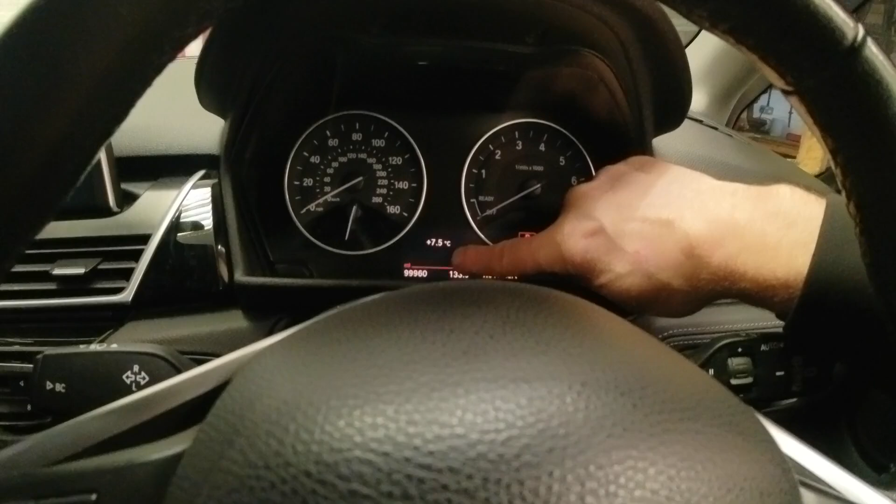So foot's on the brake, pressing the button, nothing's happening. This car's almost 100,000 miles. But our hybrid battery, which is just switched off - let's get it back on again - it's showing 10%. So we've got 10% there. We had as low as 6% or even lower than that, and the car was still starting.

These hybrid vehicles, they don't use a conventional starter motor. They actually use the alternator to start the car. That's why you get seamless change between electric drive and engine drive - you never hear a starter motor engage.

So the alternator on most hybrids is multi-purpose. It charges when the engine's running, and it's used when you want to go from hybrid drive to engine drive.

It energizes the alternator, and the alternator uses the drive belt to seamlessly start the engine. So you never hear the ratcheting sound when the starter motor engages.

We'll go over to the office. I'll show you a picture of that so it makes more sense. And then we'll get the scanner on it, and then we'll see what faults we've got and see if we can resolve this issue.

So here we are in Partslink24. I've chosen the car with the chassis number up there. So this is the alternator and starter motor. Look at the description here - it says starter motor generator.

So hybrid cars use this system - alternator, starter, all built into one. You can see it's liquid cooled as well, and it looks like we've got 3-phase wires going into this as well.

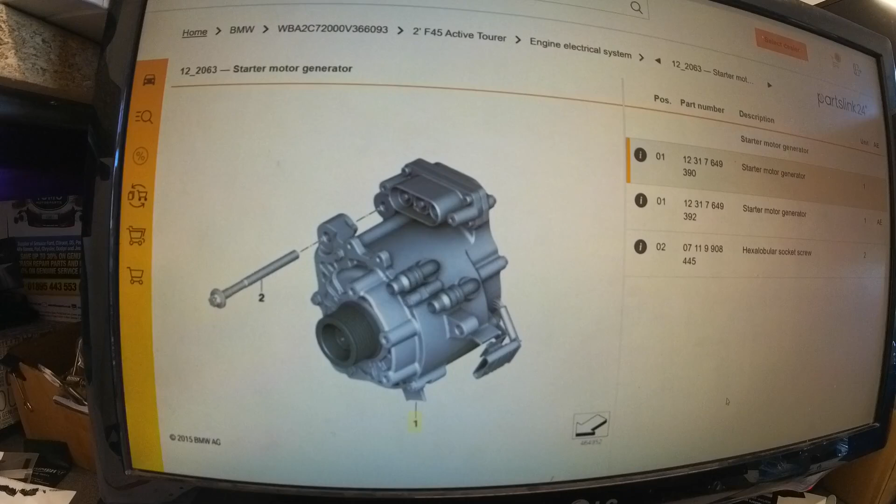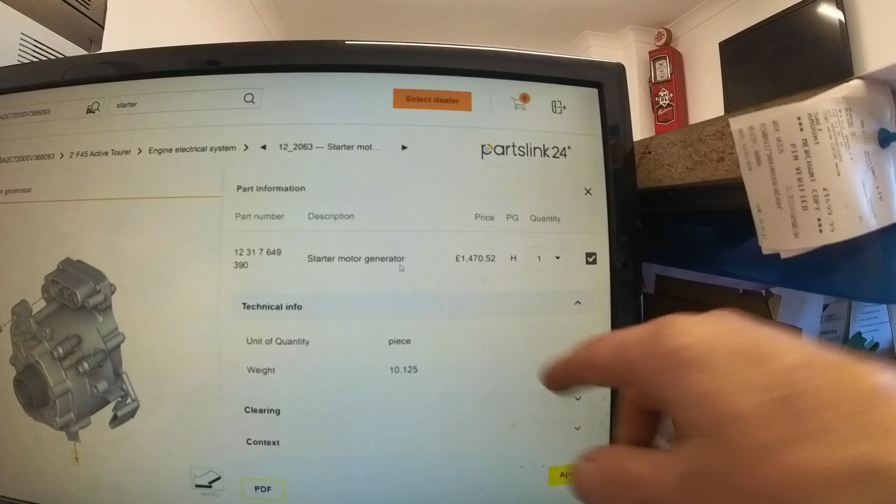Out of curiosity, we can have a look, see what these are going to cost if you wanted one. And we've got a price here - if you're in the UK, it's almost £1,500 plus tax, which is £1,800. Very, very expensive item.

There was a second part number there - let's see what that one is. Yeah, this has been dropped, so it's part numbers - that was a later number. So they used to be £1,284, now they're £1,500. So every supersession seems to put a price up for something.

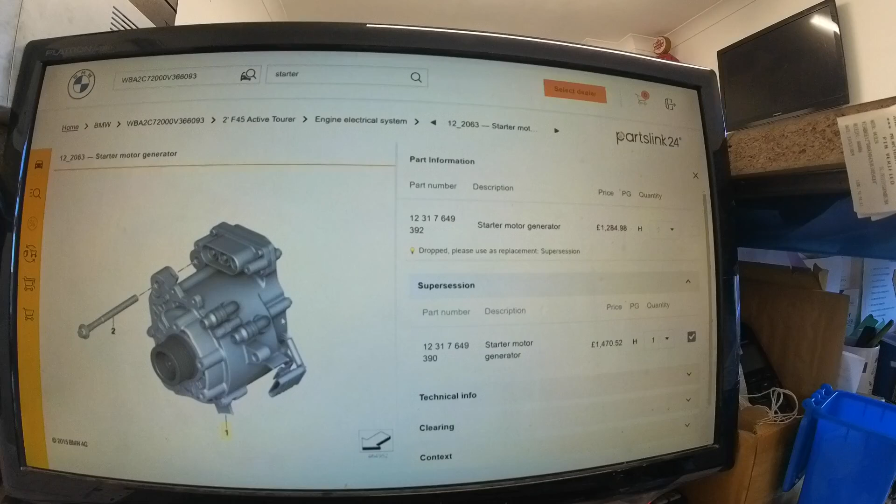But for those of you who didn't know, hopefully you've learned something today, and that's been interesting.

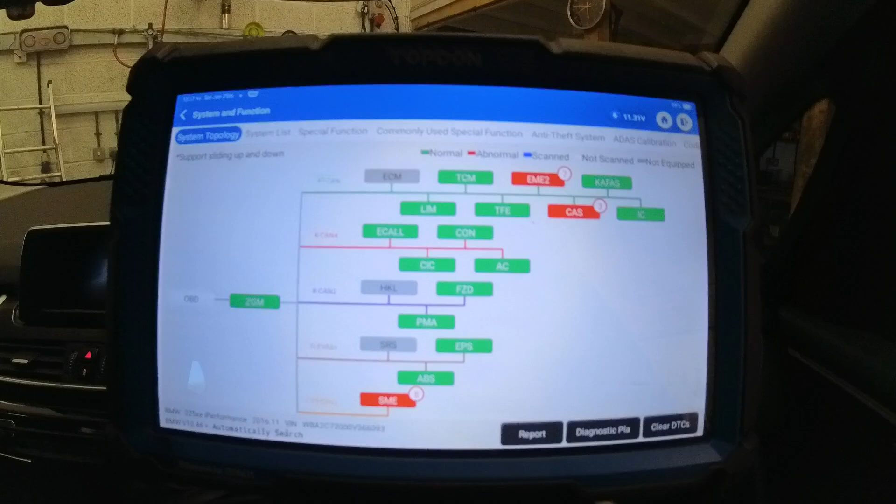Right, done a full scan of the car. We can see where the red's highlighted - we have areas of concern. Greens are all good, and the grey's not applicable to this vehicle. Well, engine control module is, but that hasn't come up for some reason.

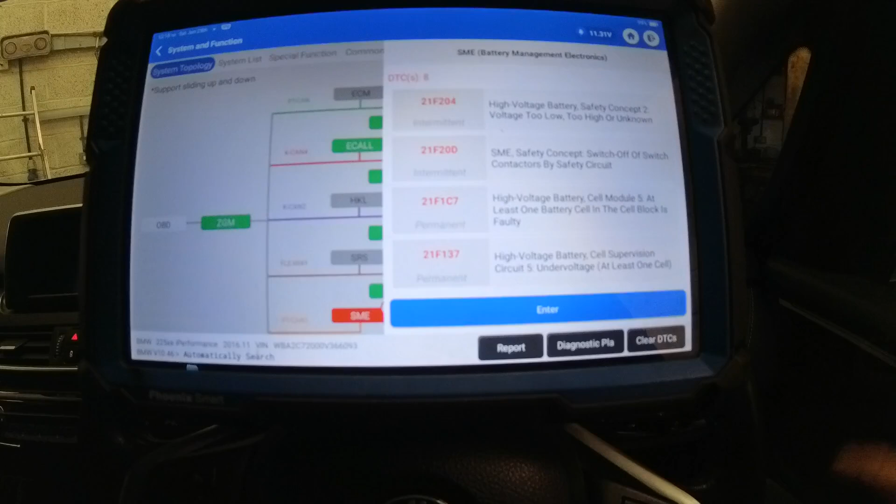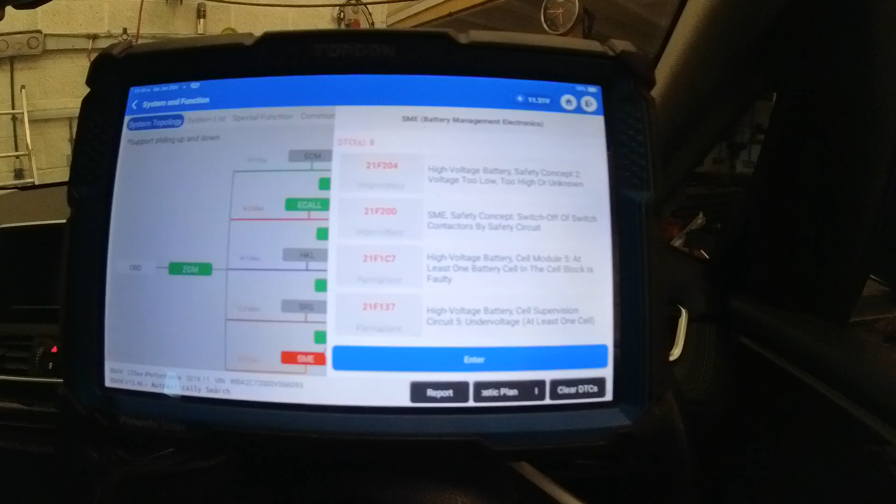Right, let's just have a look at the battery management electronics. We can see we've got quite a few fault codes in there, and the main one of concern is this one here, which is high voltage battery cell module 5. At least one battery cell in the cell block is faulty. So it looks like we have an issue with the battery.

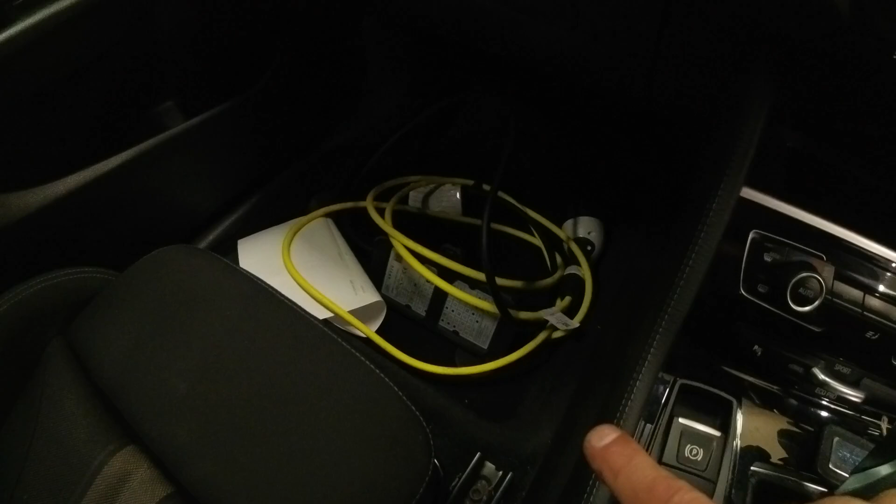Before we delve into replacing the battery, I've got a charge lead here, so I'm just going to plug that into the wall and just see if we can get some charge into the battery system and make sure that side's working.

Right, let's do that first. Just going to plug this in. Let's see what we get. Right, so it's recognised the plug, and now it's flashing red. On here, we have some symbols.

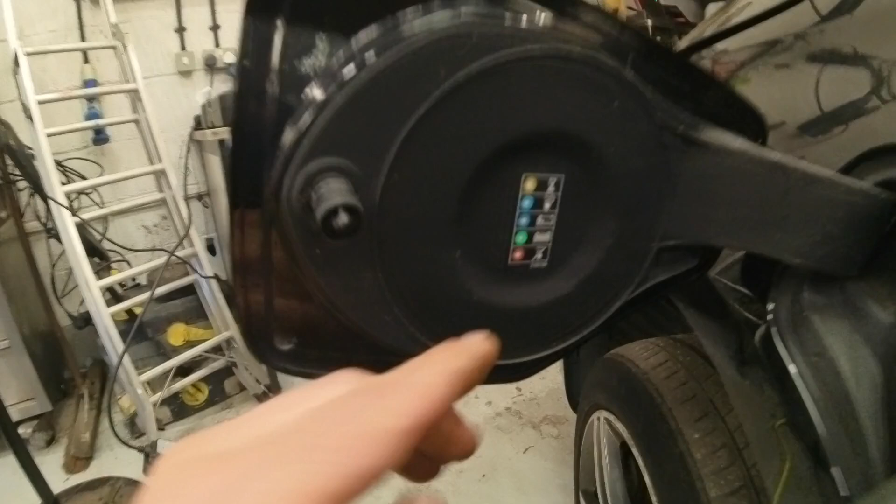Red means not charging - there's an issue. We already know there's an issue, and the red ring is a dead giveaway. So we're not going to charge this battery up.

Just going to go over to the boot, and ta-da, we have a battery. Customer bought this off eBay. We have no idea if it's good or bad, but the job for today is to drop the original battery module out, and then that one's going to go in.

There's a whole procedure for just doing this swap. It isn't just bolt it out, unplug it, and put another one in. There's a long-winded procedure, so we're going to follow the manufacturer's guide to do this properly. We're going to go over to All Data, have a look, see what the manufacturer is telling us to do, and go through that procedure.

Right, that's only a 7 kilowatt battery and I can't even lift it. My brake tester here is actually a weigh bridge - I've just set it to zero. I'm going to use my trolley, get it over there, get a hand to get the battery off, and put it on here just to see how much it weighs. If I can't lift 7 kilowatts, God knows what 75 kilowatts weighs.

Right, let's see what that weighs - I was trying to break my back there. That was a struggle. I managed to get it out on my own, but I lifted the jack up to bumper level and slid the carpet across to get it out, but I couldn't get it off the trolley. And that's why.

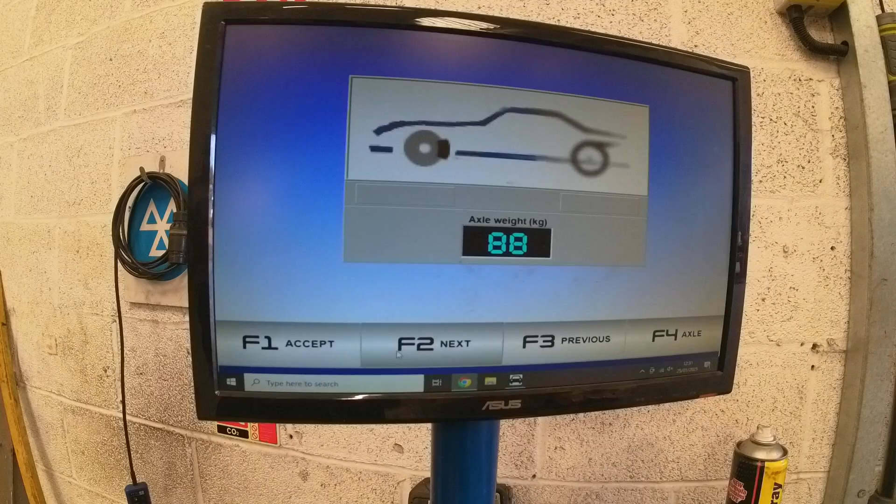88 kilos. So if 7 kilowatts weighs 88 kilos, 75 kilowatts, being 10 times bigger, that must be 800 kilos or more. That's unbelievable. No wonder you get low range out of an electric car, because you're carrying almost a ton of batteries. Wow.

Okay, that's the replacement - we need to get that one out. Let's go into the office and see what the procedure is to get the old unit out.

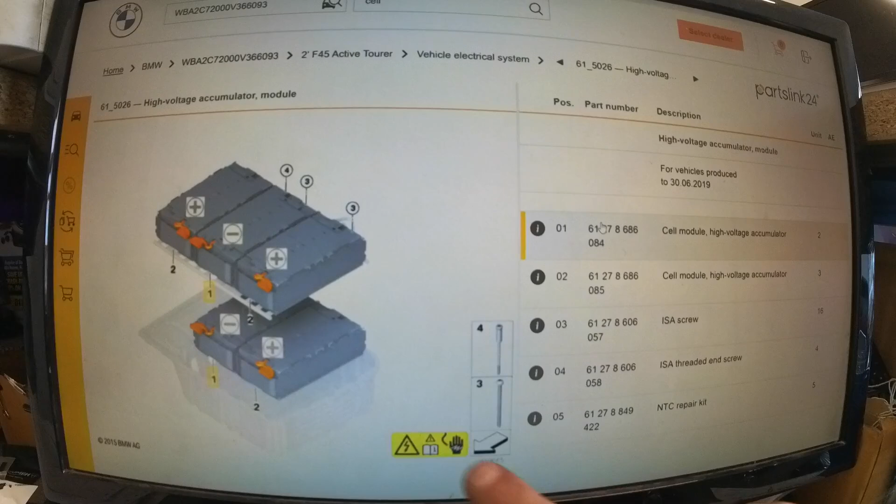Whilst we're still on Parts Link, I thought we'd have a quick look at these modules. You can see from the diagram there's 5 modules in there. They're not numbered 1 to 5, they're kind of numbered as a left and a right - you can see we've got 2 ones here and then 3 twos, and some different numbers as well. But let's have a look and see what a cell module costs.

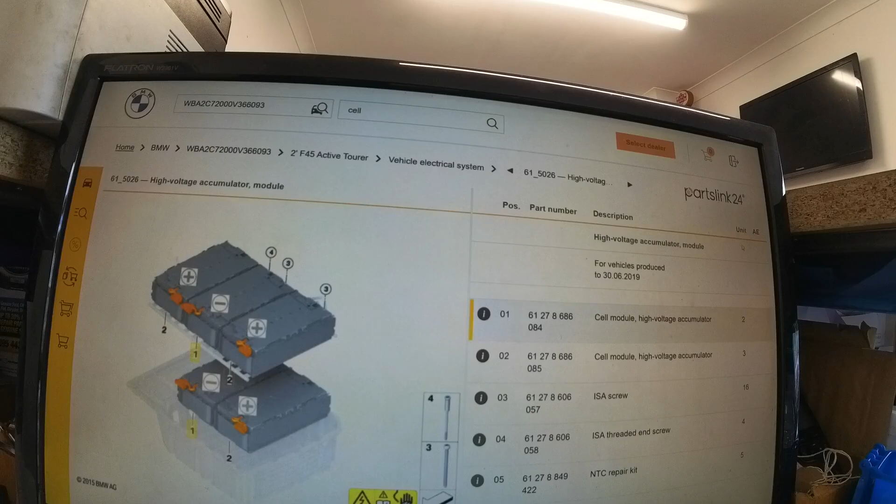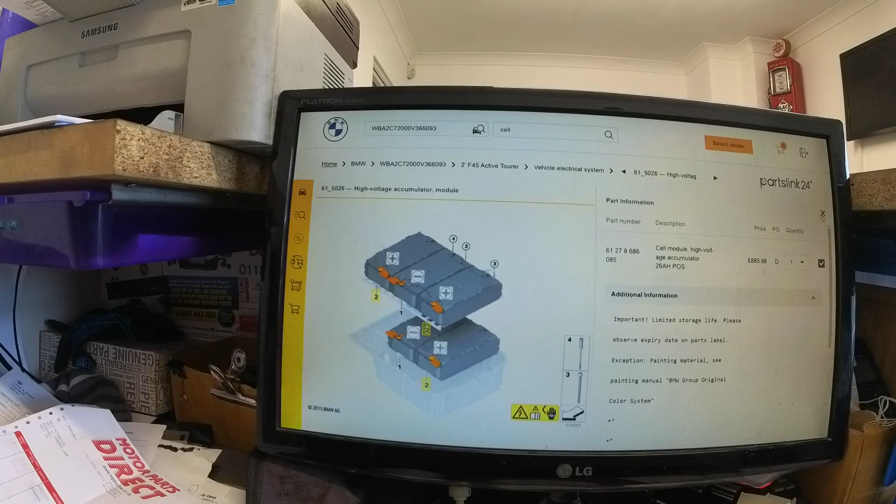So one cell module is £886 plus tax, so it's £1,000 or more. Let's see if the number 2s cost any different - yeah, roughly the same price. So to buy 5 cells it's about £5,000 plus VAT for a 7 kilowatt battery, actually 7.6 kilowatts. So if you times that by 10 to get to 75 kilowatts, this £5,000 could potentially be £50,000.

They're not normally as much as that - I know for a fact the Jag I-Pace is £36,000 for a battery module. But this is only a hybrid, and if you're paying £5,000 for a hybrid 7.6 kilowatts, God knows what 75 kilowatts is going to cost.

Right, so this is BMW tech data - I'm limited to what I can show you on this. But first we've got to drain the air conditioning system. I've just had a look at the replacement battery - yes, there's 2 aircon pipes going there, so it's using the air conditioning system for cooling and heating to manage the battery.

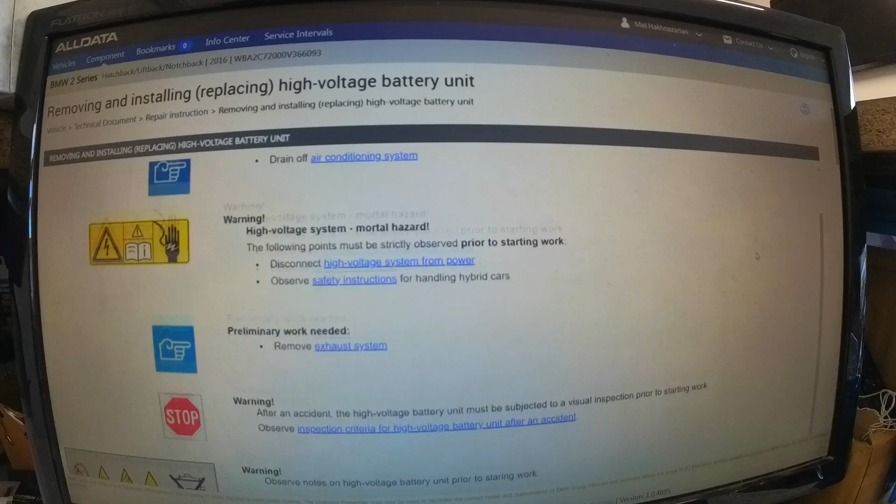We need obviously the safety instructions there. We'll have to remove the exhaust because that's in the way - to be fair, I looked at the exhaust, it didn't look too bad. Here are some pictures of the things we've got to do, what's got to be undone - brace bars and all sorts of bits. So the tech data's there, so I know what to do. I'm just going to read through it and then we'll go over and go through it step by step.

So the aircon machine is doing this degassing. While it's doing that, we're going to go to the back.

Right, got to make sure now that the car's not being charged, which it isn't because we checked that - we disconnected it, yeah, definitely unplugged. Just going to close that cap before someone walks into it. The 12-volt battery is not being charged either, and the car's gone to sleep.

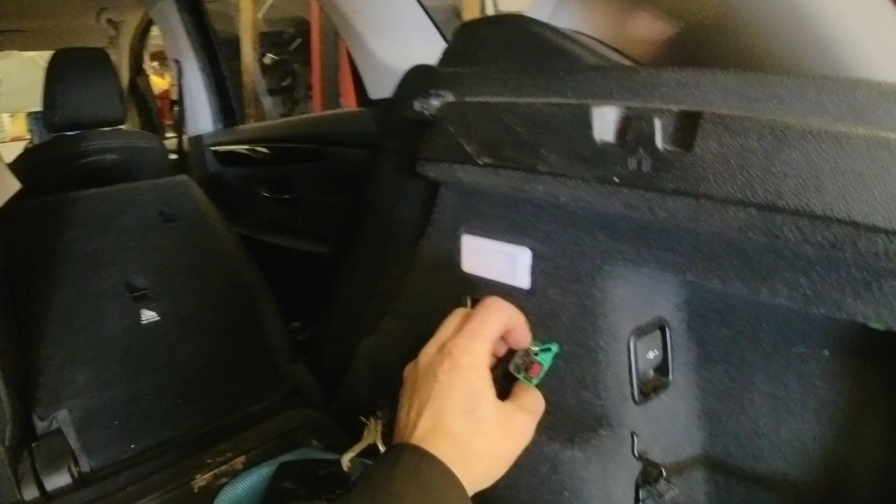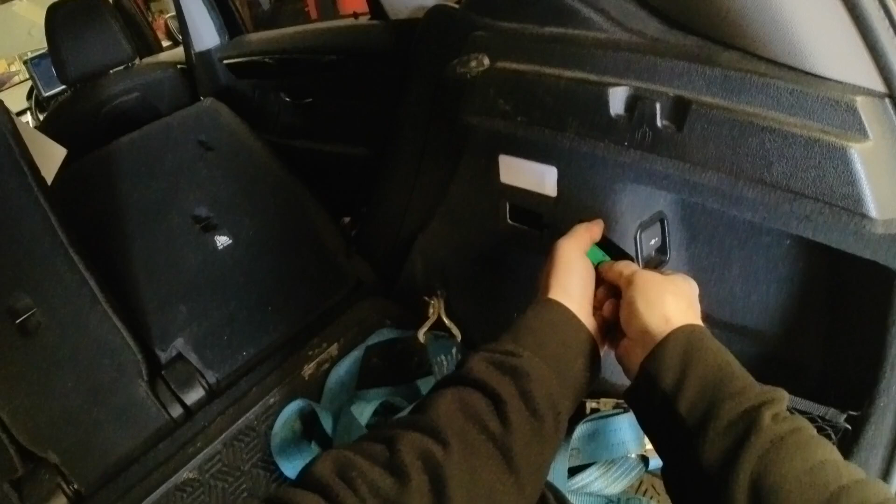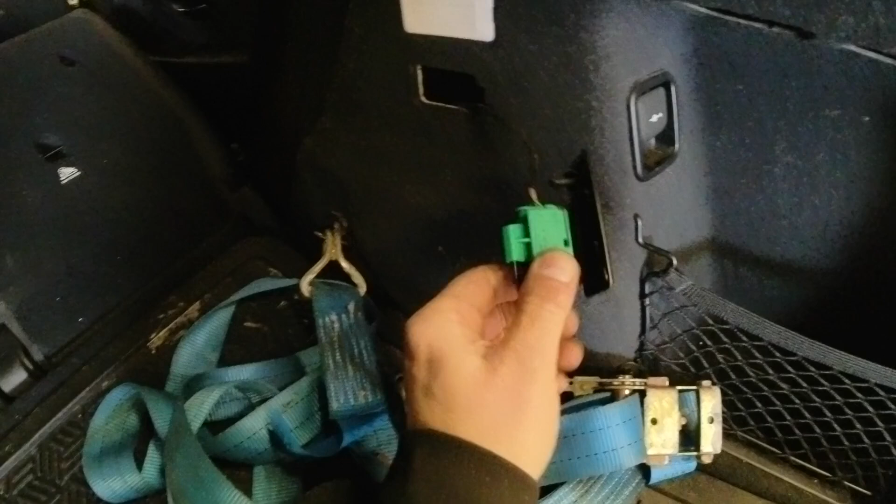So over here we've got this cover, and we need to pull the tab out. Do this - okay, then pull this tab out. So now this is the electric system isolated. See there's a hole in here.

If you're working in a workshop where you might end up walking away from the vehicle, you can put a padlock in there and it stops people from reactivating or messing with the car you're working on. But it's only me here working on it, so we don't really have an issue.

So wait till the aircon's done its thing, then we can go up and start having a look underneath. Okay, I've just stepped back in the car with the battery isolated from in the boot. I'm just going to put the ignition on, and we can see on the dashboard it says high voltage system deactivated, so we know we're safe to go.

God, I hate these chimes on these cars. Also, the air conditioning's been degassed and vacuumed. Now we're going to go up and start working on the underside.

Okay, car's up in the air. I'm just going to go to the underside and have a quick look. So here's our battery unit here. We've got this brace bar that goes across, and by the looks of it, the exhaust is in the way, so we are going to need to take that off as well.

See how far that goes forward. Right, so it's pretty much the whole thing. So from here all the way to the back, plate needs to come off, plate needs to come off, trims need to come off, and then we'll gain access to electrical and aircon plumbing.

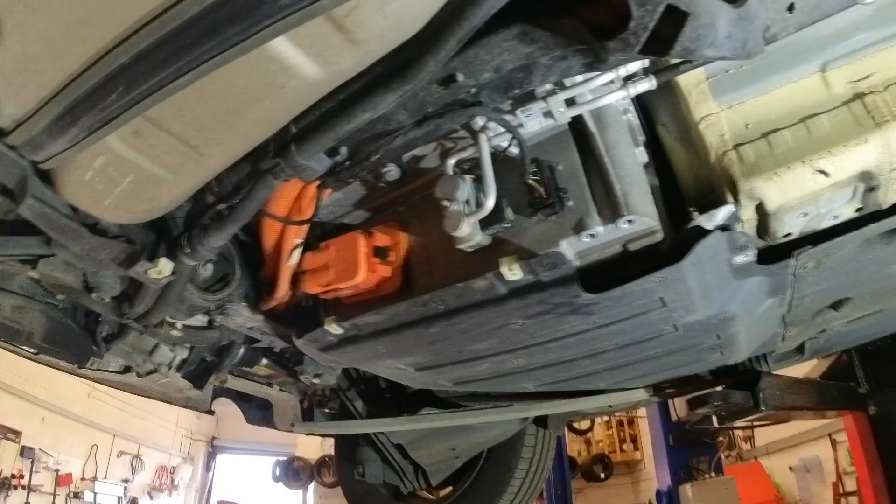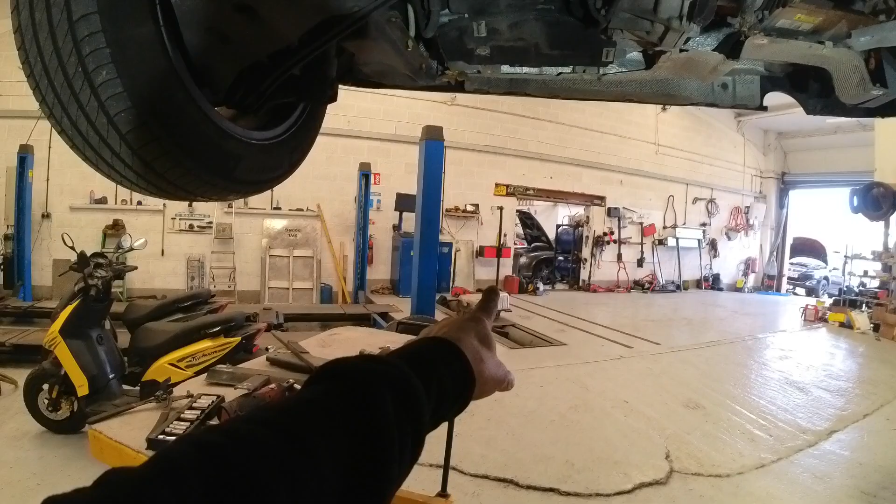Well, so much for reading the instructions. That's not the battery, that's the battery. Okay, so because I was looking at the top of that one over there, I just confused it with this one. Right, so the battery's on this side. So here are aircon pipes, the main feed and the 3-phase out.

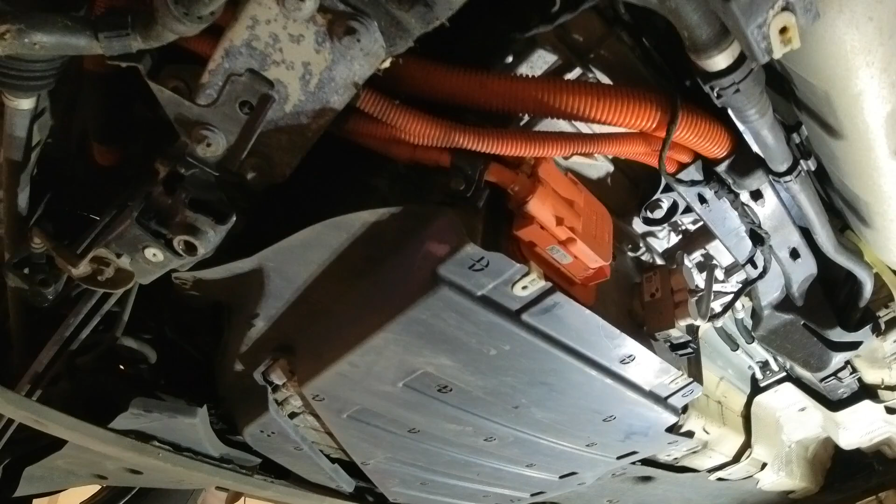Okay, so I'm going to remove this bar and this trim. Not this trim. I overlooked the instructions, but from the underside it just looked like it was reading the other way around. Alright, no big deal. You've got power tools, it shortens the workload quite quickly.

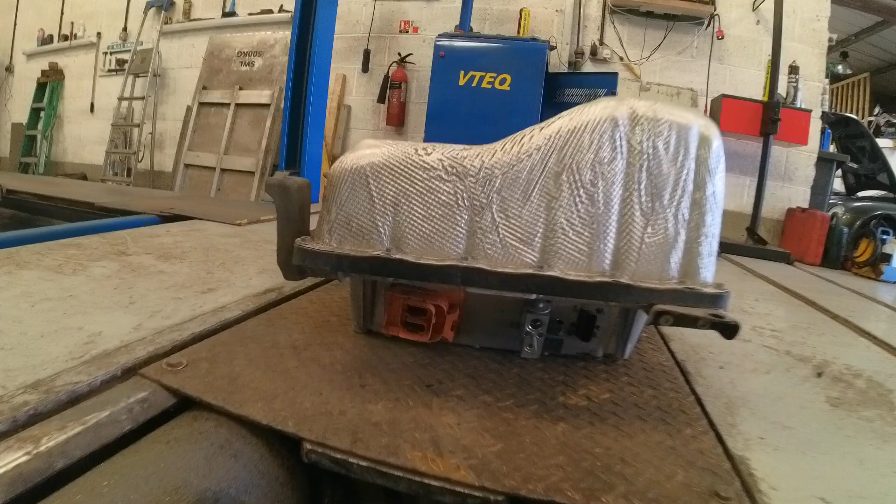Looks like everything we need to unplug seems to be on this side. Let's go have a look at the other one. Right, so those are the 3 things that we need to take off there. So everything on the other side.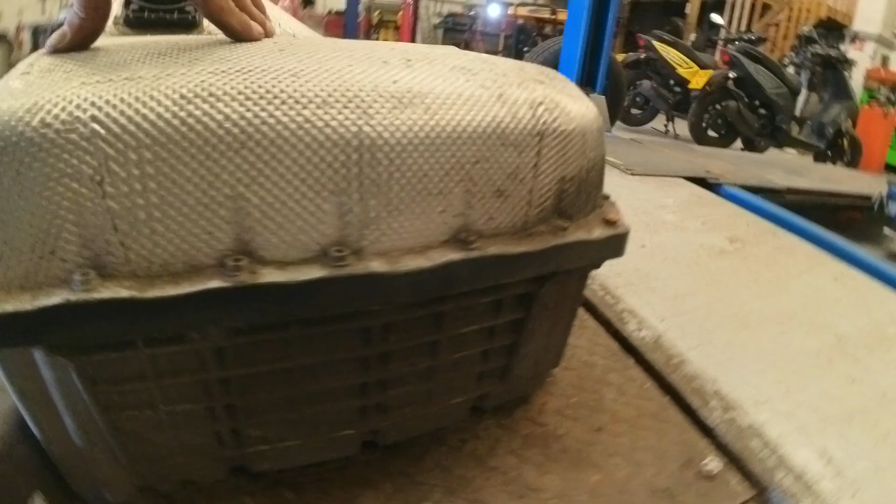No, that looks like it. Just 3 things. I'm just going to go back into reception and look at this data again.

Right, so we've done the checking of the battery, made sure it was isolated.

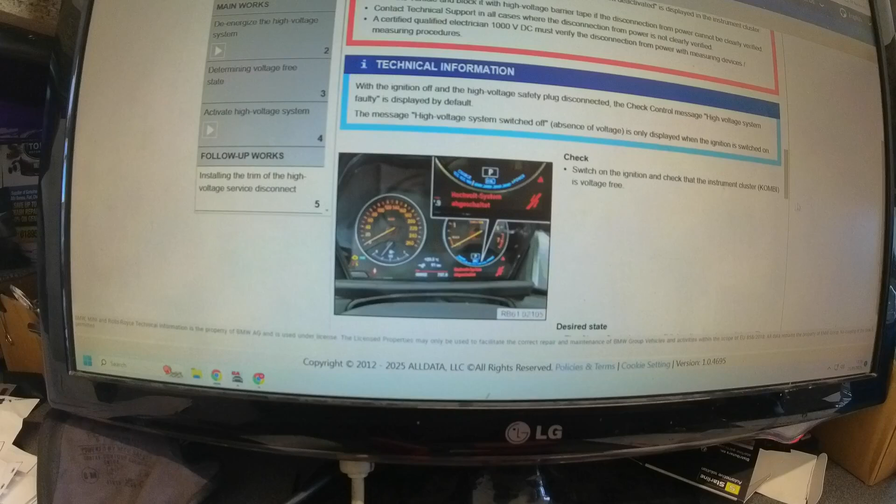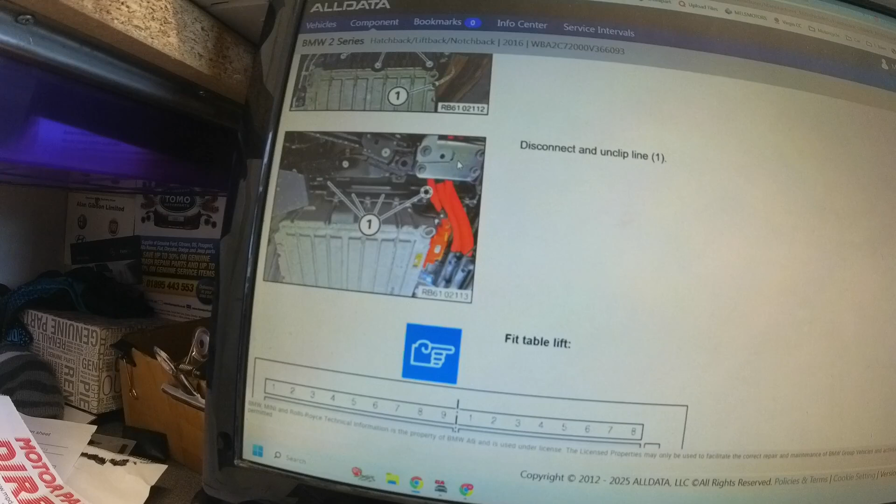So show me 3-phase wires here. Looks like that goes to the drive motor, so it looks like we have to undo those. A few other bits and pieces. I think the more trims I take off, the more evident it becomes that what we're taking off is on the other side. This is difficult to tell from the pictures.

Alright, let's go back. Okay, so this plug here looks like it goes to the control module here, but I'm not quite sure why we have to undo that, because we just undo it from here and take the battery out. So it's this and this, battery out.

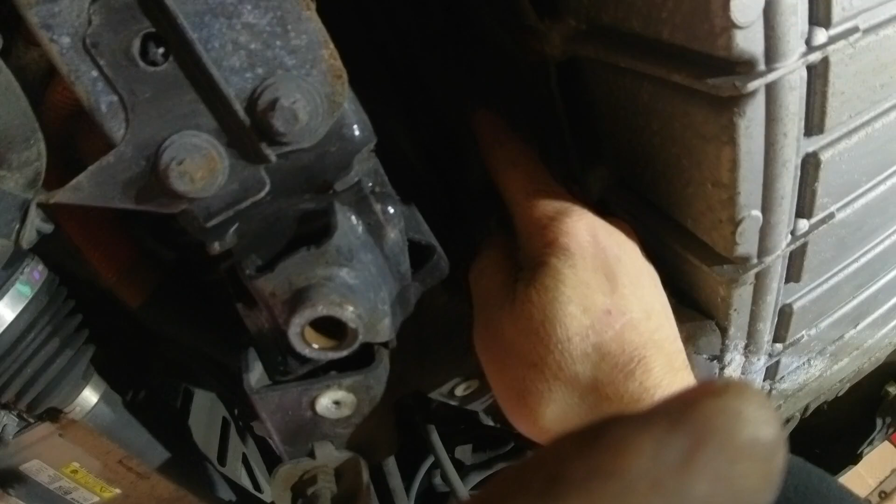You have straps off here. I've undone most of the bolts. I've got one left here which is loose, and I've got one left buried up there which is loose as well. So next thing to do is get this trolley cleared, get this under here.

I'm going to stack some timber on there, just so that the tray's lower than the battery, so that I can get my hand up there and do the rest of the bolts, and then hopefully we can wangle that out. The only thing I'm worried about now is this ramp leg might be in the way. I'm going to give it a go and see where we get to.

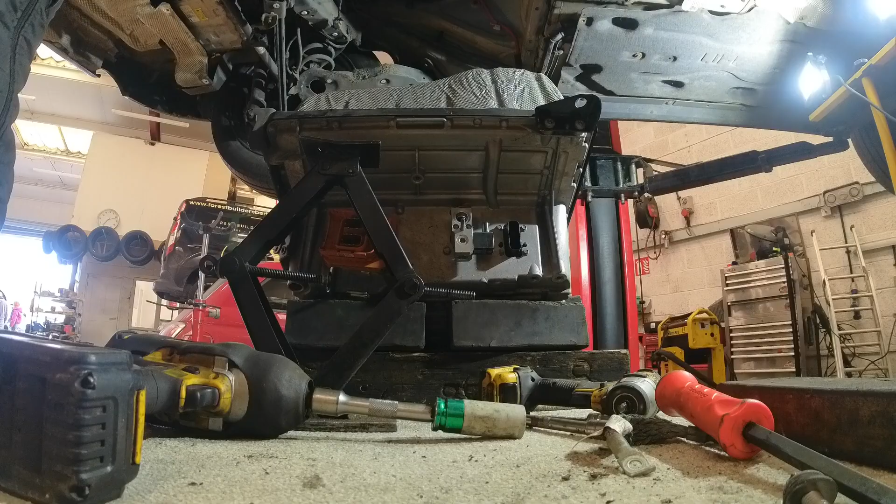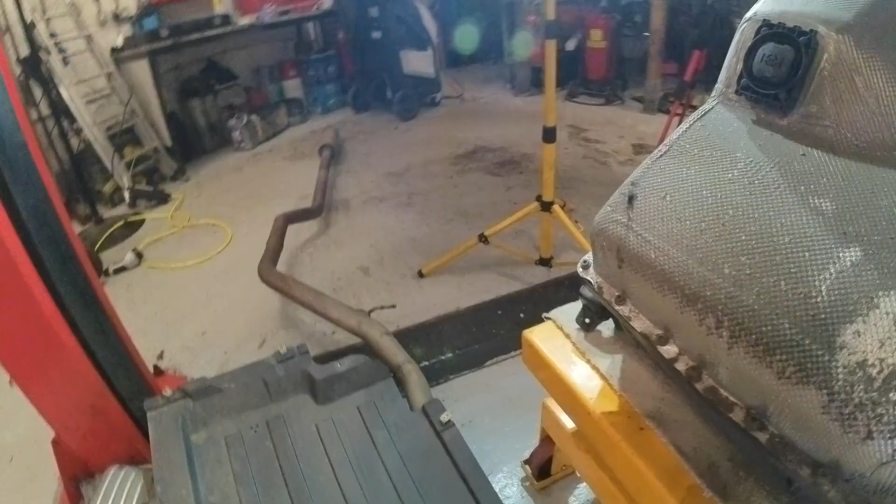There we go, battery's out. It's a bit awkward, but I did get it out. We just need to go back up at that angle, and then we'll hopefully be able to get it back in.

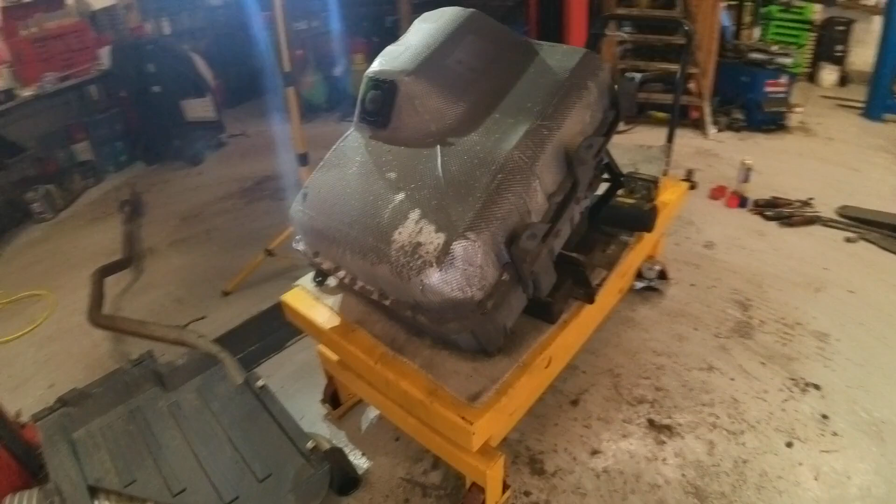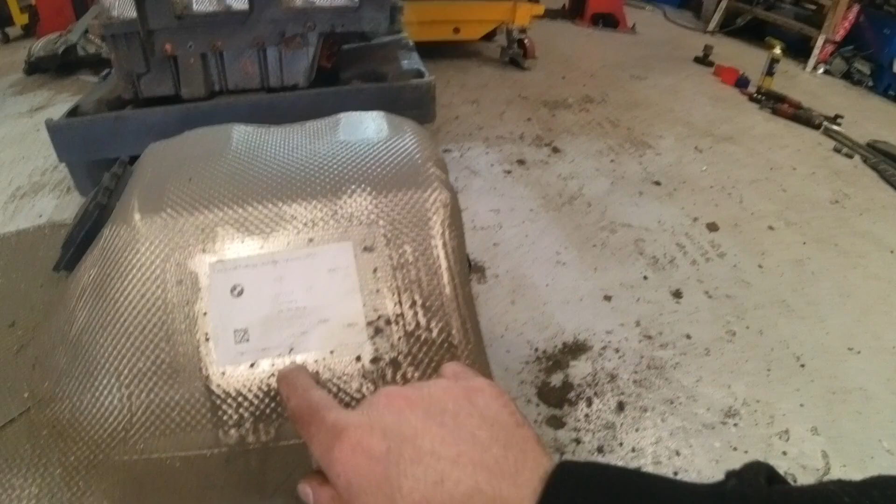Okay, both batteries are there. The one came out of the car. This is the one that's going in. Just going to check the numbers. So this is 7,613 watt hours. So 7.6 kilowatt hours, exactly the same.

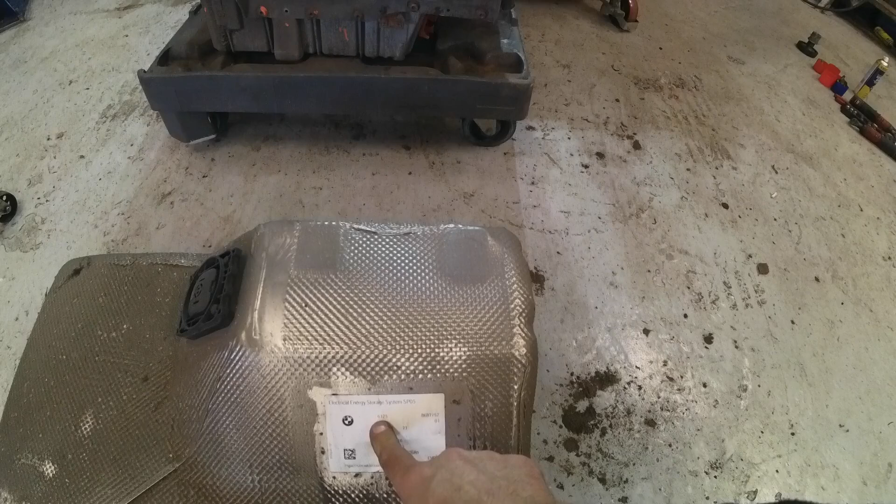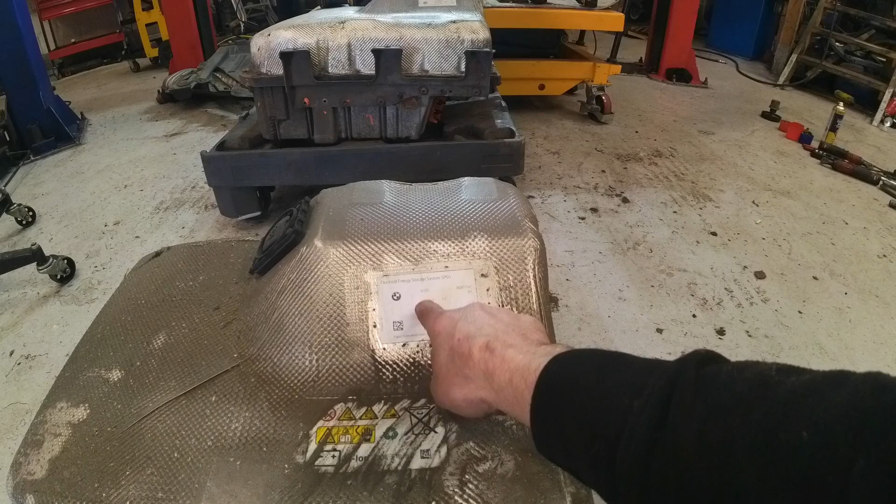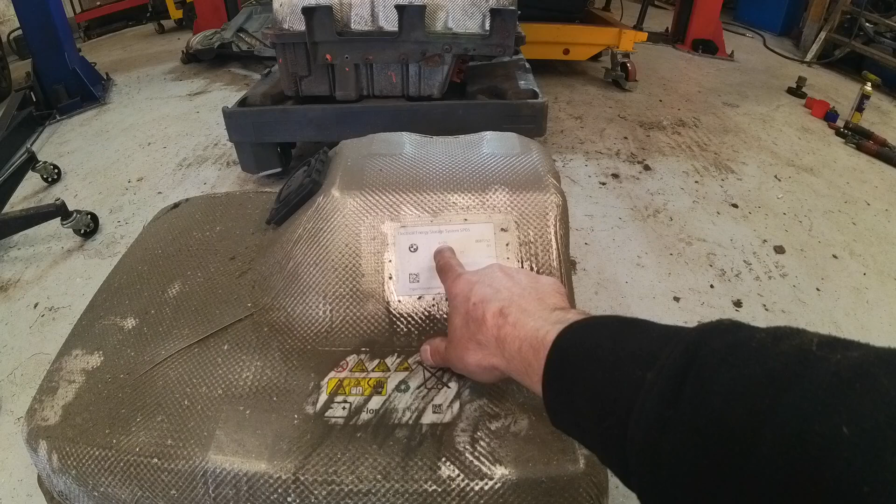Part number ends in 120. Well, that's probably not the part number, to be fair. This one, 8 - yeah, this is the part number. Actually, you can't buy this whole system off BMW. You've got to buy modules inside, because we couldn't find this number or even the whole module in PartsLink. Might be available if you ring them up, but what I understand is these are repairable, so you buy modules individually. So normally you'll have that number combined as a whole number, as opposed to 4 digits and then the rest of it. 8687752, 8687752. So they're exactly the same battery.

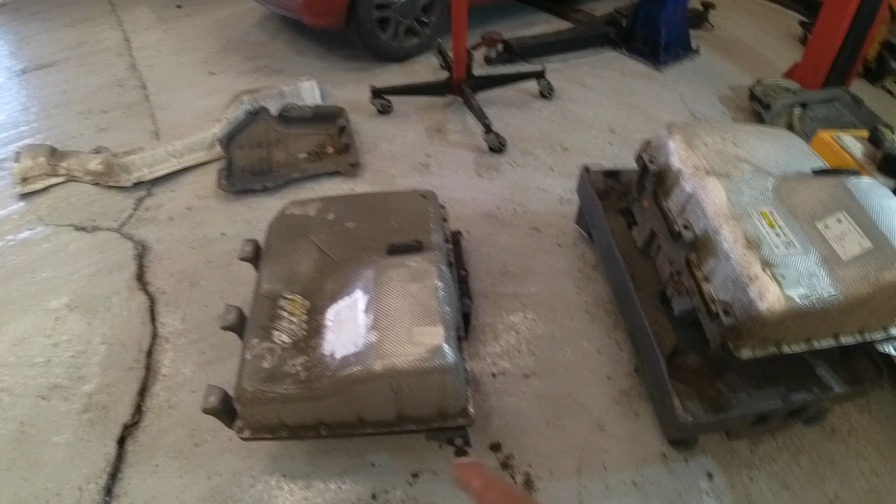Apart from the control unit built inside this, that's programmed to the car. That one's programmed to a different car. So now we're going to take the lid off the original one first, because that one we know is faulty. But be mindful, if you attempt this, the battery modules are inside, and if you touch anything in there it could be pretty painful. So I'm going to open the faulty one before I attempt the other, because if anything goes wrong with this one, or we can't swap anything over, then I have to try and get that one programmed to this car. So next step, undo the 50 odd bolts holding that together and see what's inside.

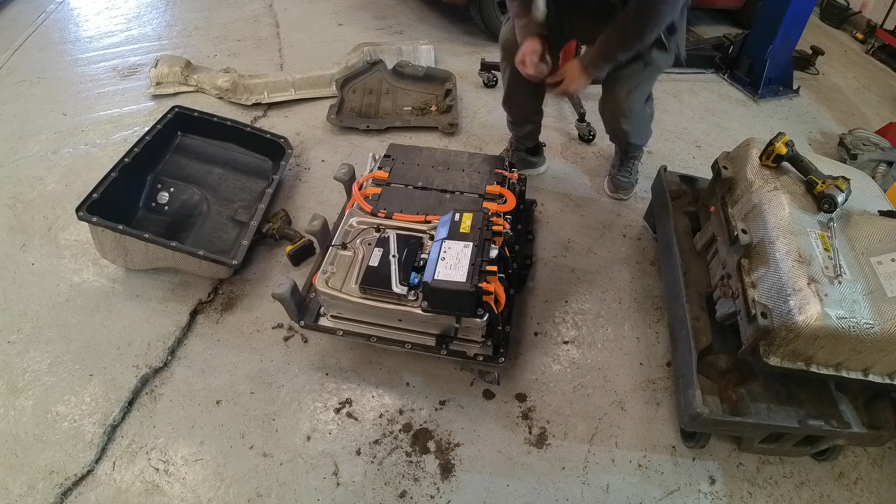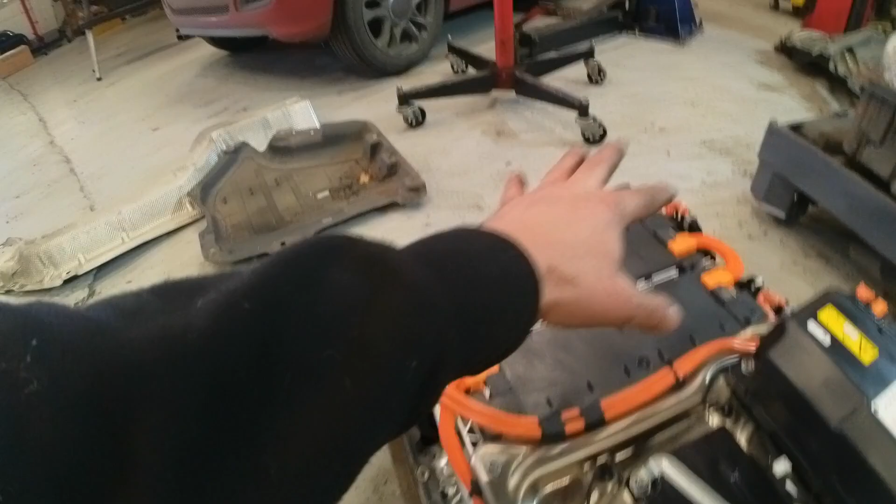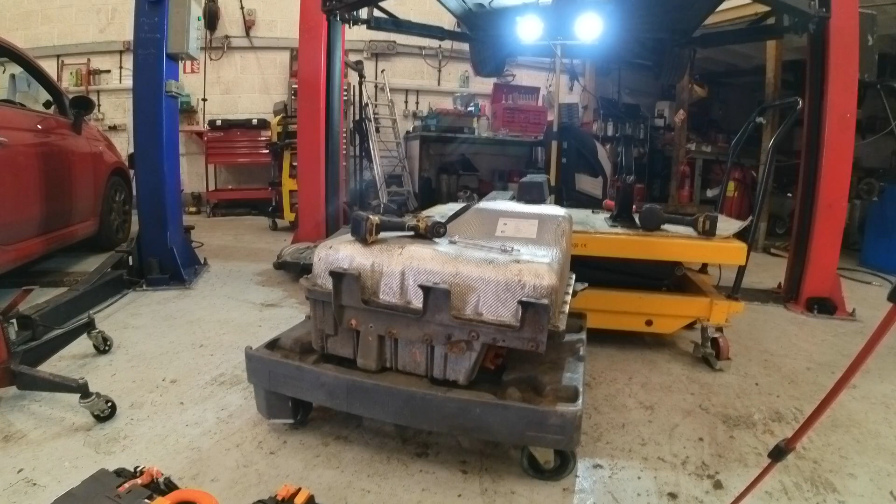Okay, so these are the battery cells, 2 there, 3 at the bottom. These are the ones that cost £1,000 each. This control unit here, I'm going to swap this with this one and probably this one as well. I'm not sure what this one does, but I'm going to put those two into that one, and then when we put it back in, the car's going to recognize these modules and we won't have any issues with reprogramming. Some modules are not reprogrammable - once they're programmed to one car, they'll stay programmed to that car, so I'm not going to take the chance.

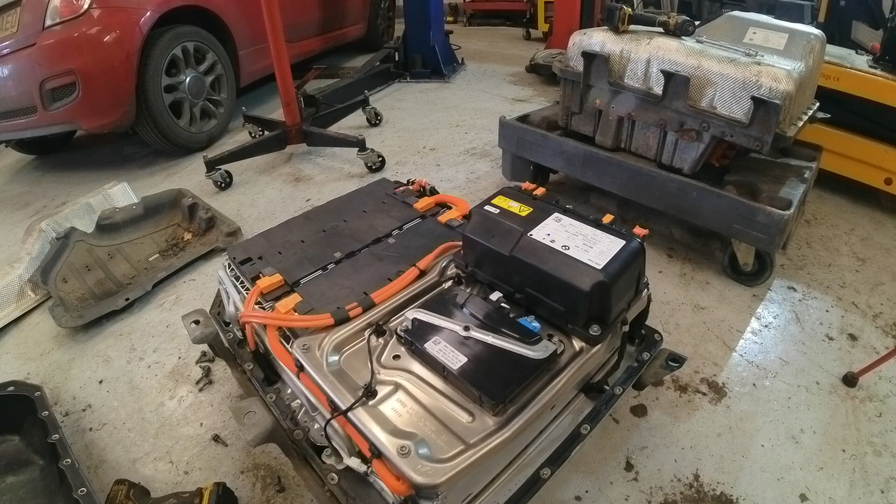You saw how easy it was to take the cover off, so I'm going to do that, swap them out, and then put it back in.

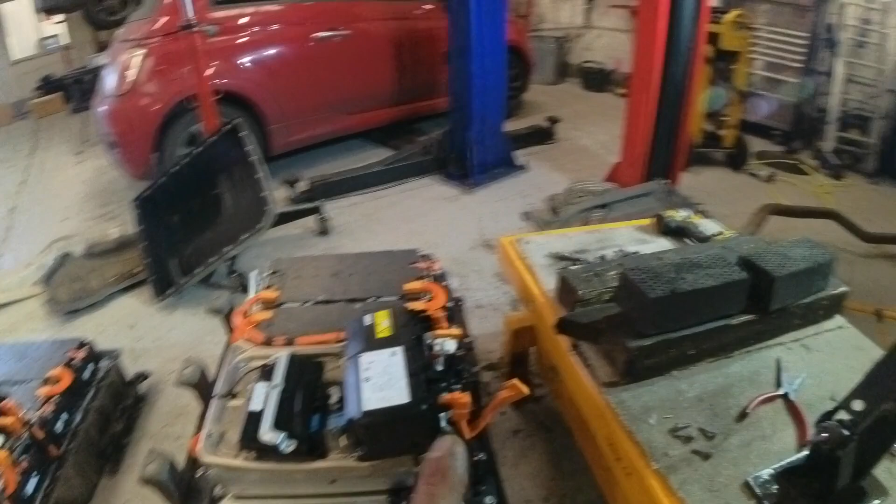Okay, both batteries stripped, modules both out. This is the one we want, this is the one we don't want. So that's that one, and this unit - I think this is the unit that activates the power to come out the side down there. And that's that one. So this battery is not scrap because 4 of the modules still work in there, so someone could probably utilise that. If they've got a module down, that will help somebody, but it's going back to the customer anyway. So I'm going to bolt these back in, and then we'll stick it back on at that funny angle we had it at, and then we'll get it back in.

Okay, back together, up she goes.

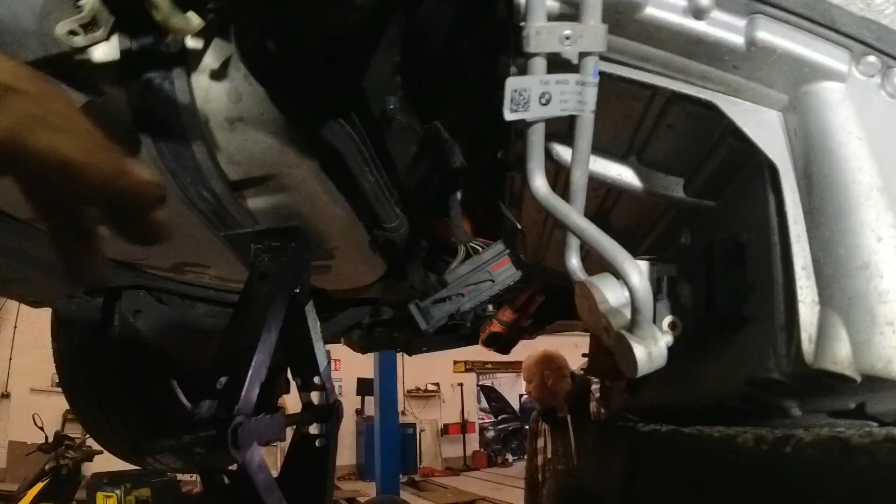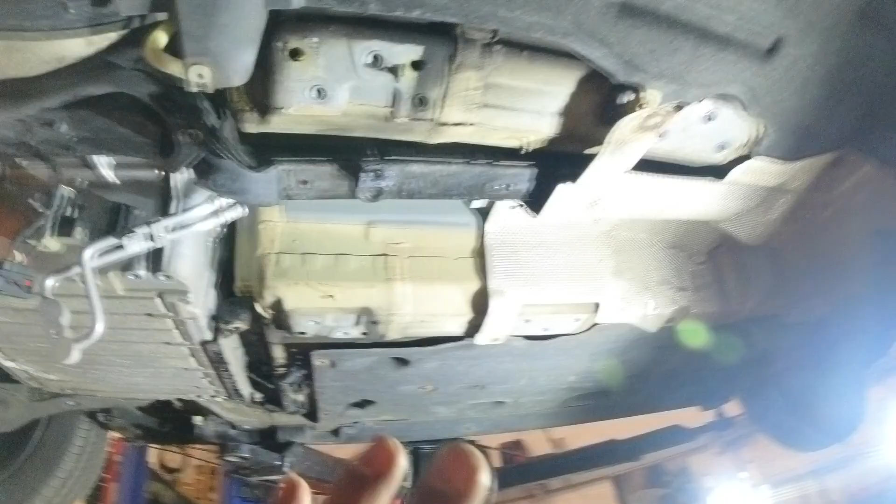Okay, battery's back in. It's a bit of a 3-man job, but we got it in. Saved me having to take all these cables out - just having it at a slight angle really helped. This is the first time I've done this, so far so good. Just need to do all the plumbing now, get the electrics back on, the aircon. I'm not sure if this is going to work with the aircon degassed, but I don't want to gas it until I've checked everything's worked. So we'll put it back in. I'm not going to put the exhaust on or any of the heat shields.

Once all that's done, we'll have a look on the dashboard and see if we've still got the same faults, and see what percentage this battery is, to be fair, because we're not even sure if this battery is any good. So let me do this, and then we'll have a look in the car.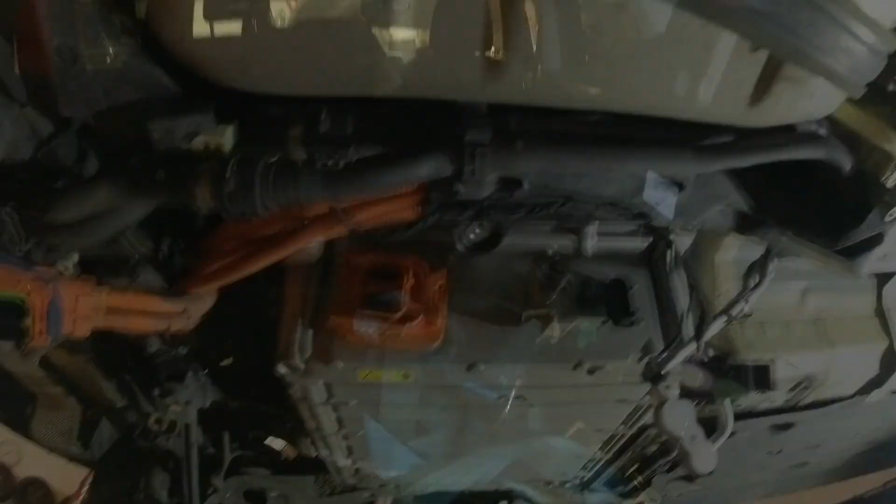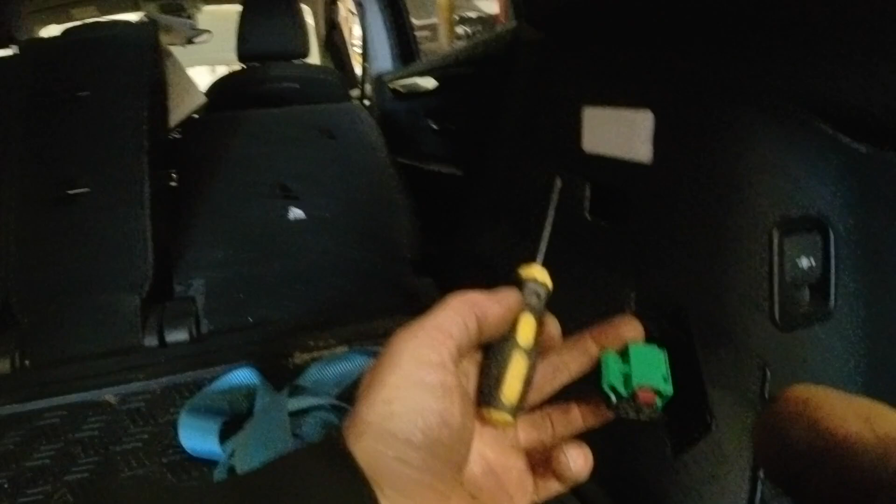Right, I'm just going to reset this battery again. So push the black tab back in - had to do this two-handed last time. Well, that was a bit difficult to get in. On the side here, it's difficult to see, but there's a little security tab, so I get a pick to put into the side to release it, so I can get the clip back in. Even though it's got a little padlock bit on there, you still can't push it in unless you free that off, so there's no way it's accidentally going to power itself up.

Right, that's done. I'm going to leave that out for a minute and put the ignition on and see what we've got.

Okay, well, still telling me 10%. Still telling me 10%. I'm going to see if this will start. Well, the car started - it's got no exhaust on it. Well, that's good news, so we know the battery works.

We're going to go outside and put the charger on and see if this will charge up. State of charge low - it's just ironic that they both had 10%. There we go, so that's yellow. Let's just count down to time, I guess. And now it's gone to blue - it's charging.

Well, that's good news. It's Saturday afternoon, so I'm going to leave that on charge. Probably come back Monday, finish the rest of the job off. You probably won't notice a thing because this video will be seamless. So the customer's going to be happy, so I'm going to give him a quick call so he knows where we're at.

I just came in the car to get the scanner out so it's not left in there all weekend, and I thought, well, I better just scan it and see if I can clear these codes. So let's do clear diagnostic trouble code, see if they'll disappear or not. Otherwise we'll have more things to look at on Monday.

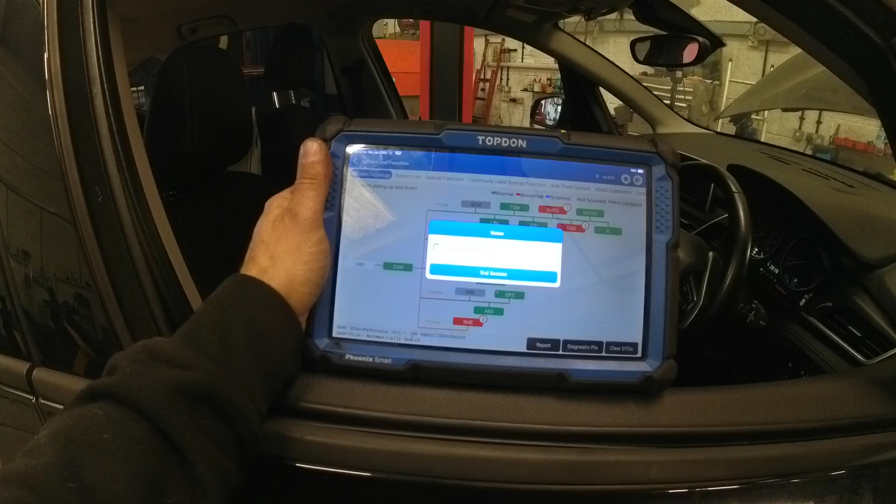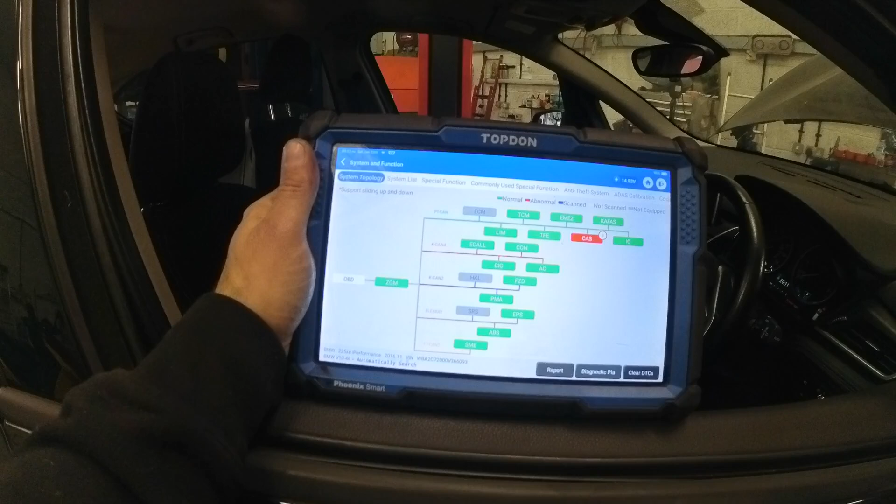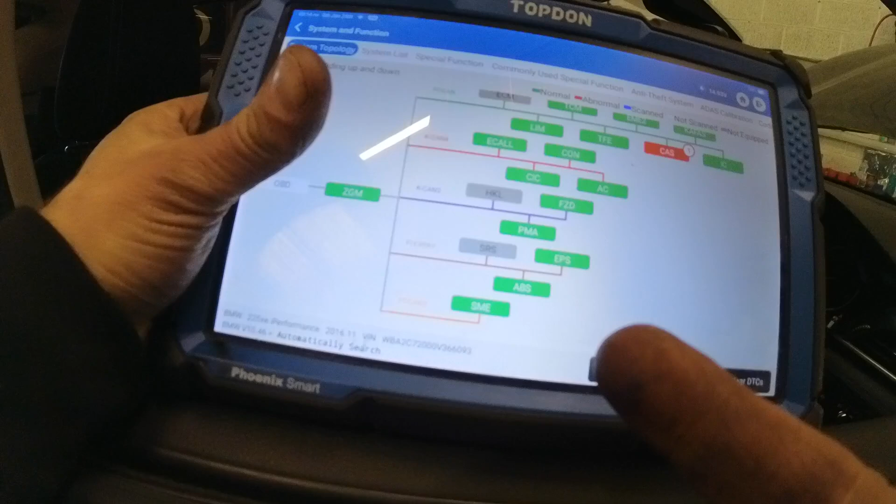Well, all the important codes cleared. What's this one? Car access - not worried about that. Battery's all clear, all done. And on the dashboard, you can see that it's charging as well.

Brilliant news, especially for the customer. Ignition off. We'll come back and fit all the rest of the stuff again on Monday.

Well, it's Monday, we're back in, regassing the system, just doing a vacuum at the moment. We'll get the gas back in. I didn't fully charge it on Saturday - I left the charger on and got one of the guys to take it off. I didn't want it charging over the weekend with nobody here. Charger's back on, let's see where we're at.

Right, we're over three quarters full, so we're making progress there. As soon as I've done the aircon regas, we'll get it up, put the exhaust system back on, all the under trays, and then we'll double check the fault codes and go for a road test.